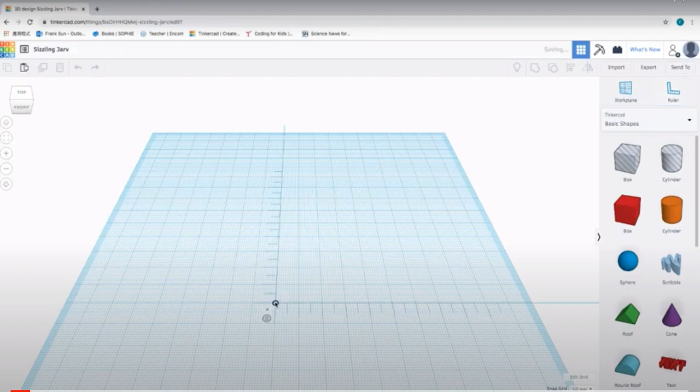Next is to create a ball joint. So we're going to start by again setting up our ruler. So a ball joint is composed of two parts. One part is a socket that holds a ball inside, and the ball is able to rotate in all directions inside the socket. And so that's our goal.

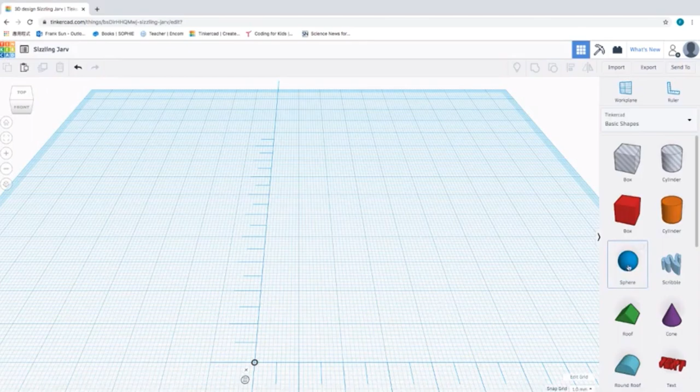So to start, we're going to start with a sphere. And I'm just going to keep it a 2 centimeter diameter sphere to start with. So we'll start with the socket part. And so for the socket, we are going to take part of the top off.

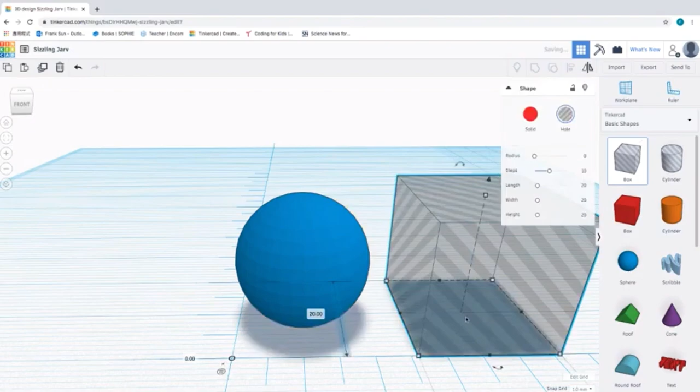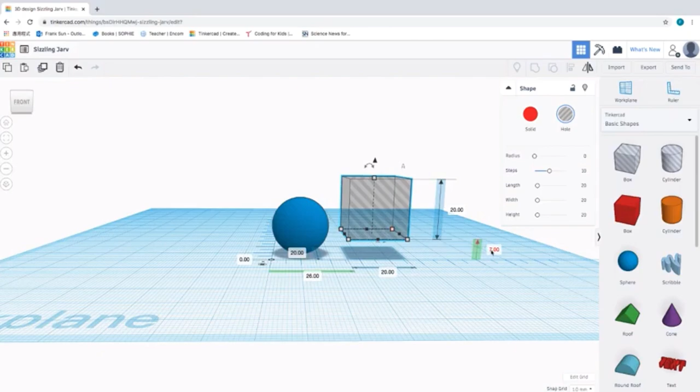And so first of all, we're going to raise this space so it is from the bottom there. Let's see. So this ball here is 20 millimeters in height. So I'm going to cut the top 5 millimeters off. So I'm going to set this height to 15 and move this so that it's directly over the sphere.

And I'm going to group these two together, and you will see that I have basically cut the top of the sphere off. Now I'm going to carve the middle, and I'm going to leave the socket as a 2 millimeter thick wall. To do that, I will have to create another sphere. And so this time the sphere is going to be a hole, and it will have a dimension of 16 and 16 and 16 in all directions.

And I'm going to raise this up by 2 millimeters from the bottom, because that's how thick our wall is going to be. Now I'm going to impose this over my solid ball. Again, it's 2 millimeters from each side. And so now this hole sphere has been centered to the middle, and I'm going to group those two together, and there we have our socket. So this is the socket part of the ball joint.

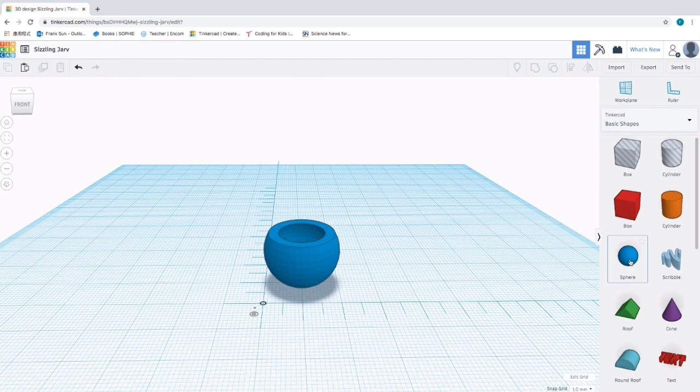And so we're going to create the ball inside of it. And so the ball inside of it has to be smaller than the space. And so I'm going to give it a really tight fit with about 1 millimeter space, so half a millimeter space. So the inside hole has a diameter of 16 millimeters. So I'm going to make a ball that is 15 millimeters in all directions.

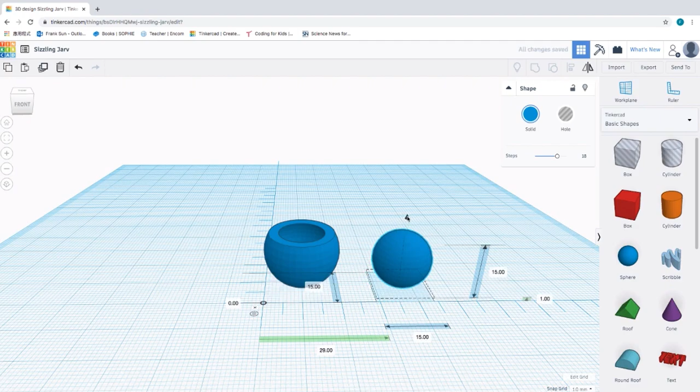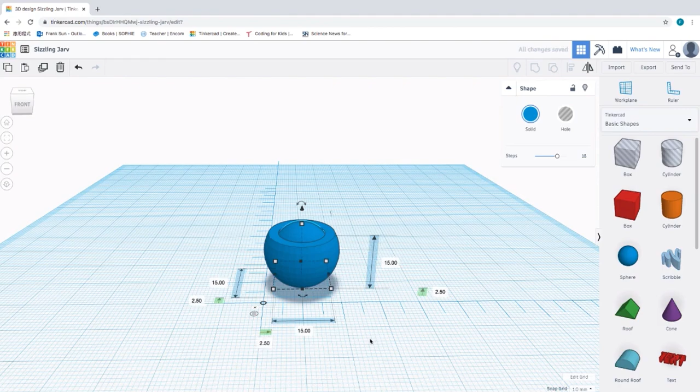And then I'm going to raise this up by 2.5 millimeters. And I'm going to have it centered. And again, I will need to have 2.5 millimeters in all directions. And so now you can see that this ball is now centered within this socket here.

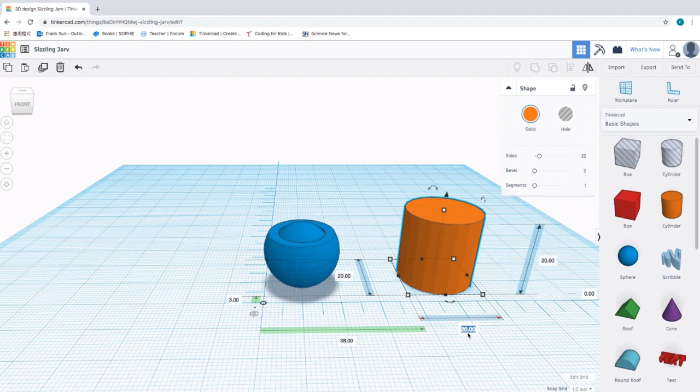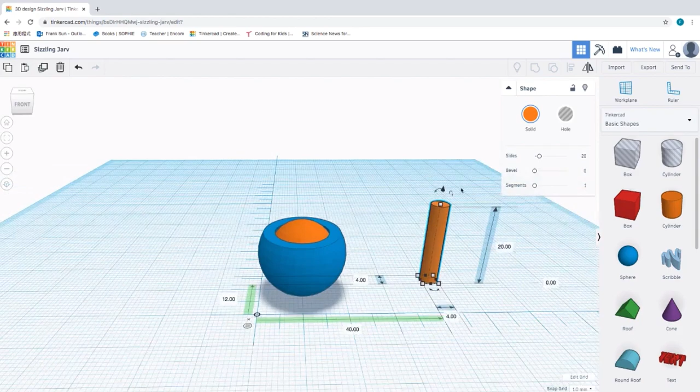And so if I add a little cylinder and make it a little rod that comes out of it, just going to say 4 and 4. I'll keep it at 20. And to distinguish between the ball and the socket, I'm going to also change the color here to orange. And so I'm going to raise this just slightly. And I'm going to move it so that it's centered.

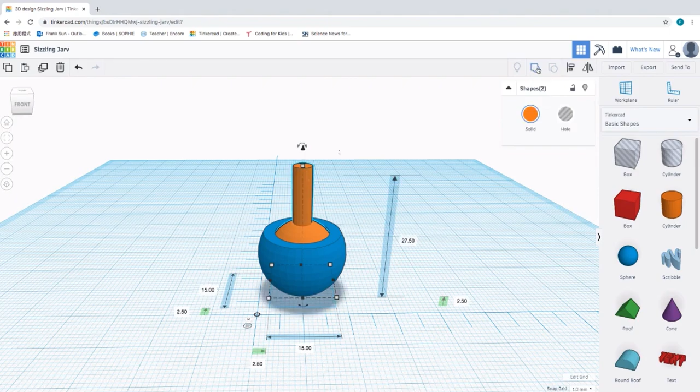Now, here it's a lot easier to use these distances from the center to measure how far apart you are and to see whether you're going to have it centered. So in this case, 2.5 millimeters from the origin on both the x and y direction will allow this rod here to be centered onto the ball inside. And so if we join those two shapes together and group, we have the ball inside.

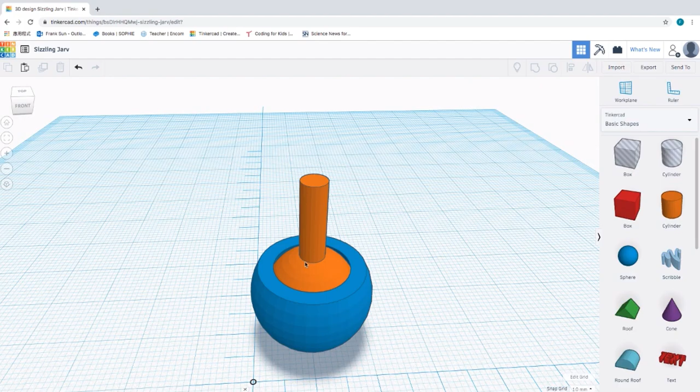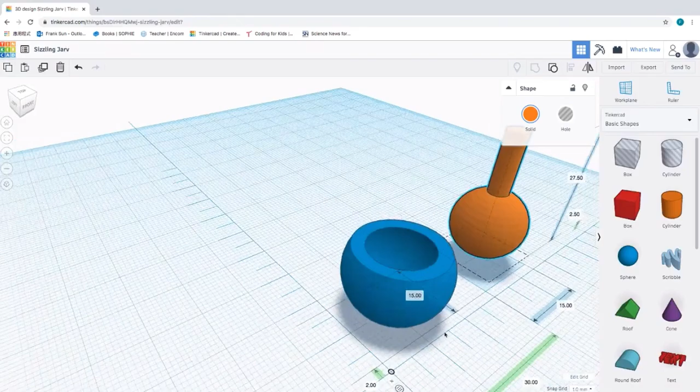So you can see that we have created this ball joint. So this ball joint will allow whatever is attached to this rod to move freely in all directions on the top. Now, in a real application, sometimes it's useful to actually print these two things separately. And in order to fit the ball into the socket afterwards, it would be a lot easier if we actually cut off part of this socket on the side so that the other two sides that are printed are slightly flexible with the material.

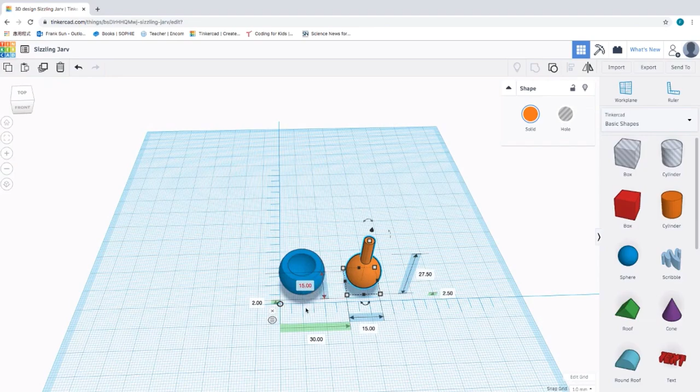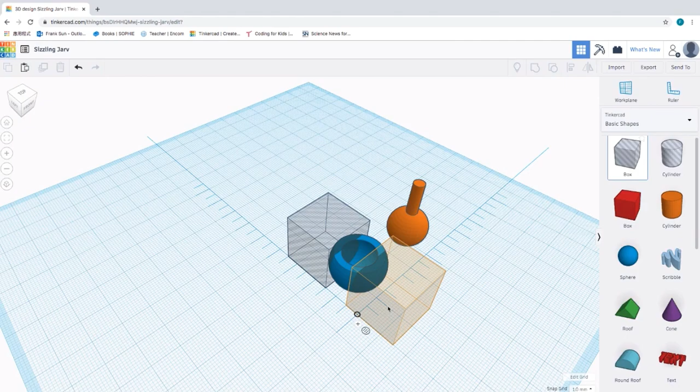And so to do that, we can just shave off some of this socket part. So let me show you how to do that part. And that is going to be just a simple cutaway with a rectangle. So I'm going to cut about 5 millimeters off each side, and another one would be 5 millimeters from the other side. And so you can group these three objects together to create something like this.

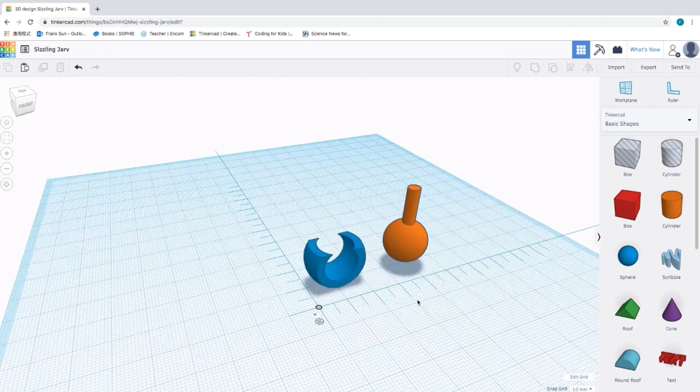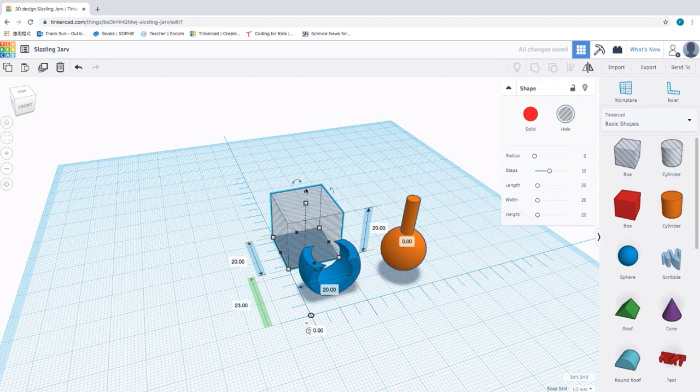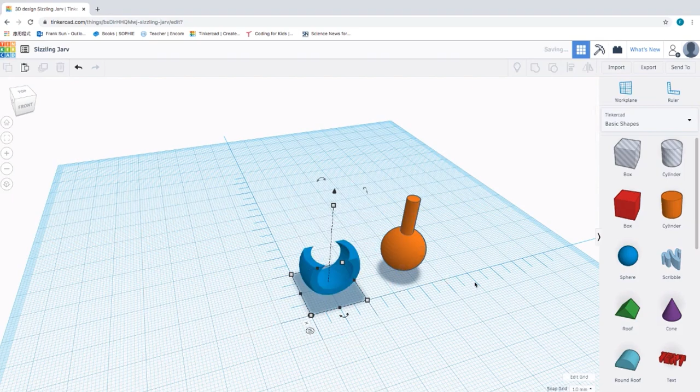And so once you have this, it would be easier to print these two things separately, and then after you print them, to insert the ball into the joint. You can even shave it a little bit further from the top to make it a little bit easier to be inserted. So the idea is that as long as you have part of the socket being bigger, the ball will sit inside the socket freely.

So then in this case now you can print these two parts separately, and once you print it, you can just fit this one in between the socket. You can actually insert it, and so it will look something like this. Okay, so hopefully this will help you to create a ball joint of your own.